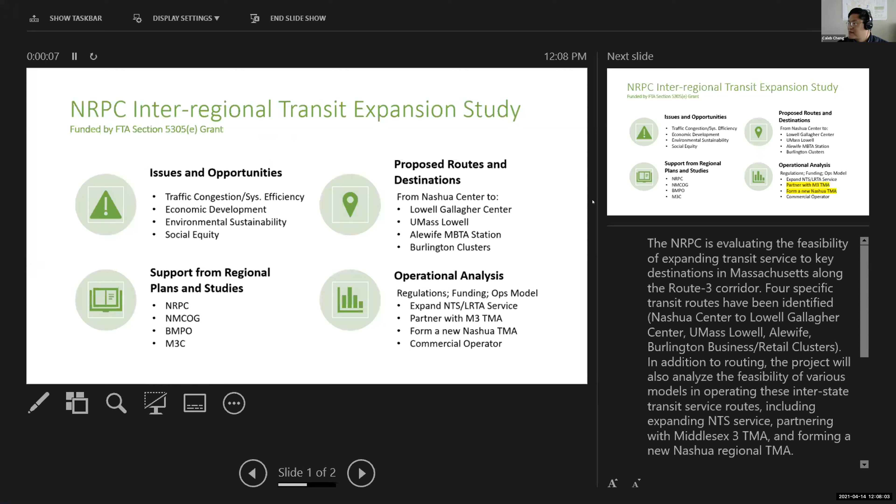Thanks, Greg. So let me share my presentation. It's more of a, let's see, which screen are everyone seeing? Yeah, you gotta change. I gotta change? All right. Or I can just leave it as is, in slide mode. Okay. I'll just do this. So can everyone see this well? Okay, great.

So just an introduction, giving the background. I know Greg said the details can be saved for another day, but we can still give you a snapshot of where we are and what we'll be looking at. The interregional transit expansion study is looking beyond the Nashua region and seeing what opportunities, particularly south of the state line, lie, and is funded by the FTA Section 5305(e) grant for this fiscal year. So we're trying to wrap it up by end of June.

The benefits of having transit connections, particularly to major employment centers, is well known. I'm sure everyone here is familiar with that as well. So some issues identified, and opportunities that this transit service can help with, include traffic congestion and system efficiency. System efficiency refers to both highway systems and also existing transit systems that might be better served by connecting this gap between systems across the state line. Economic development opportunities and opportunities to improve environment and also social equity by providing access to those who might not have a vehicle, and also to additional housing and employment opportunities.

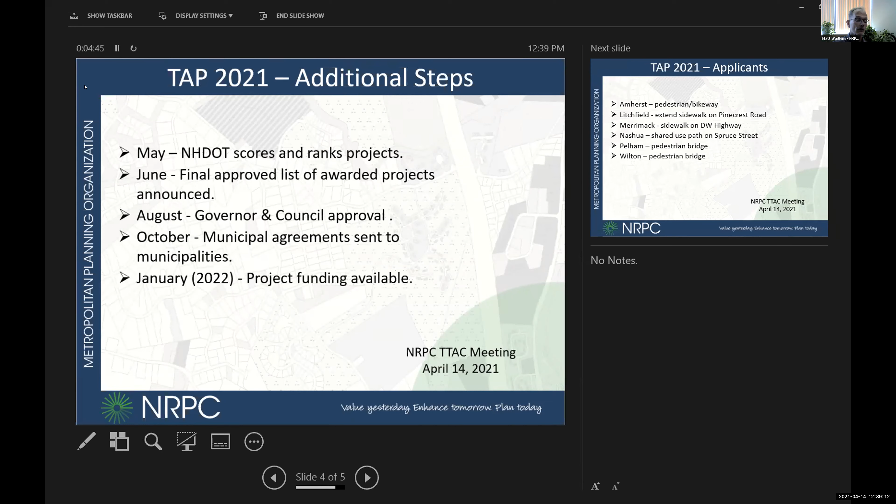Here are the applications you're going to be hearing about: Amherst pedestrian bikeway, Litchfield extension of a sidewalk along Pinecrest Road, Merrimack a sidewalk on DW Highway, Nashua a shared use path on Spruce Street, and Pelham and Wilton both proposing pedestrian bridges.

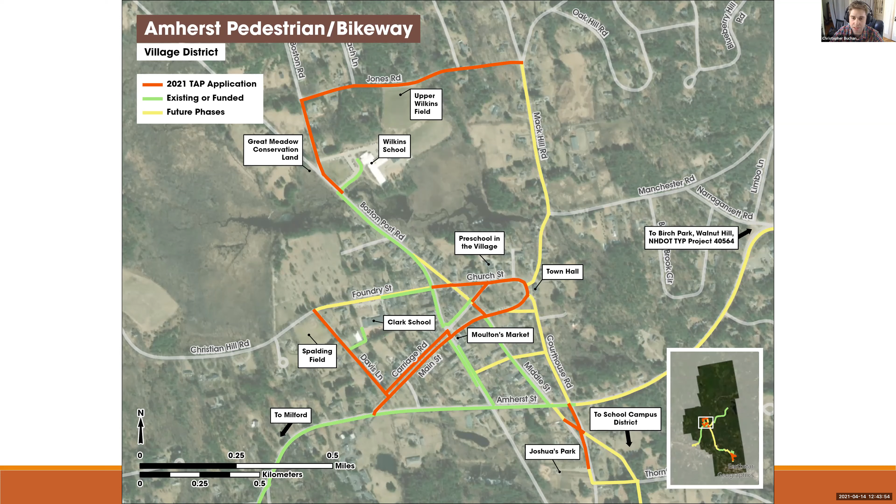Going down to the south here is the school district area, and you'll see Souhegan High School and Amherst Middle School. Just a couple of quick details about it - this is no new concept.

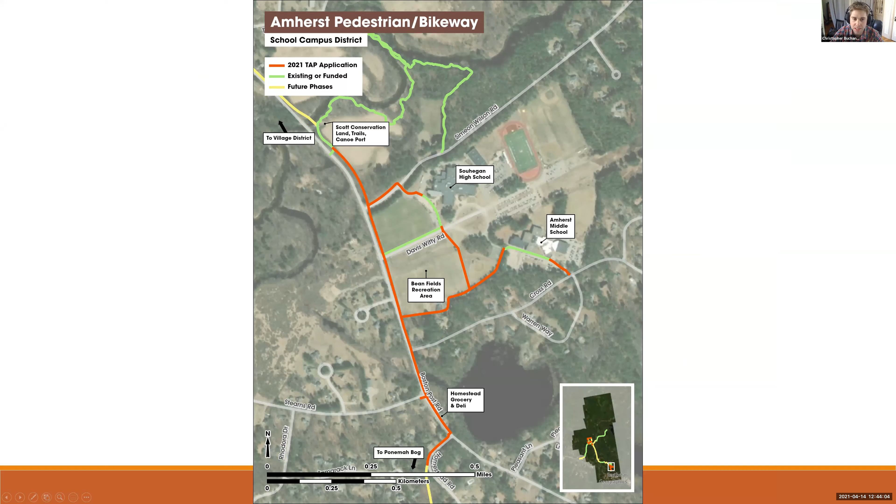One last detail about those various plans is that this concept has repeatedly come up, starting in 2001 with the CLD Engineering plan, but also as part of the NRPC's 2006 town systems preservation study, part of our bike ped plan, etc. I don't need to list them all, but in the end it was further reinforced by our 2019 multimodal master plan, which set out a vision for this sort of thing.

That plan was adopted by the Board of Selectmen in 2019. So the real goal is to have connectivity and to roll these things out when it's cost effective. A lot of this construction is scheduled to occur with or without our TAP award, just as conventional road construction. The TAP application would enhance the scheduled road construction by adding multimodal facilities within the town's right of way.

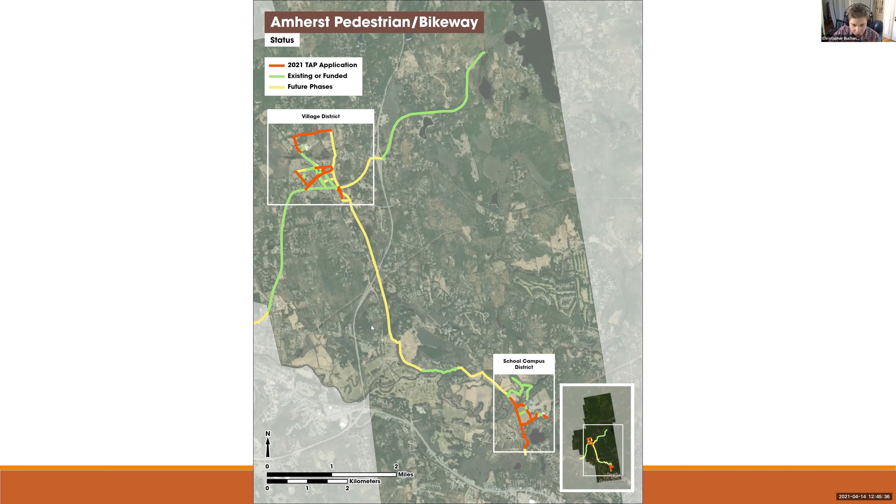So that's a little bit about the concept. I would then hand things over to DPW Director Hahn, and I'm going to stop sharing my screen.

Good afternoon, I'm Eric, the DPW Director at Amherst. I have to tell you, for this TAP grant application and for most of the other aspects of this project and others, I'm in the best possible position. I feel so good as the DPW Director, right?

So we have the support from the Board of Selectmen, very active support. Their main criteria seems to be let us go somewhere - people don't want to just go in loops around. So this first part, which is going to happen regardless of this TAP application or award, will be to connect the Amherst Village Center to the Milford Town Line and then into the Milford Oval. And they're asking me not to do this on existing funds.

So last year, the residents supported and really by a significant majority passed a $287,000 warrant article to help build this side path this year. And it is being done concurrently with the reconstruction of Amherst Street itself.

This will provide the backbone that all of the other components that are part of the TAP grant application will support. We will be able to connect to an existing facility that we are constructing starting basically next week. We're having the pre-construction meeting on Friday, and tomorrow we're having an informational Zoom meeting for the people in Amherst.

So we have our Pinecrest Road Sidewalk Extension project. We're very excited about it. This project has been discussed in town for many years. If you want to go to the next slide, Matt, let's talk about the project goals.

There are three goals for this project, and the first and foremost is to fill the gap in our existing pedestrian sidewalk system. We have a multi-purpose bike path that runs about 6 miles long, the full length of Albuquerque Ave. On Albuquerque Ave we have our high school, several recreation facilities, our brand new fire station, and our police and town office complex.

So that bike path is used every day by residents. We have outsiders coming to our community using this as well. We have the state forest where people will park their car, use the state forest trails, or use a portion of our multi-purpose bike path.

The town, way beyond my time, started realizing they needed to connect Pinecrest, the 3A and Pinecrest, to the Albuquerque bike path. They started that project connecting the elementary school located on 3A, and worked up Pinecrest, which terminated at the middle school. This grant application is looking to take that point at the middle school and continue it up to the Albuquerque bike path, which is about 5,000 feet.

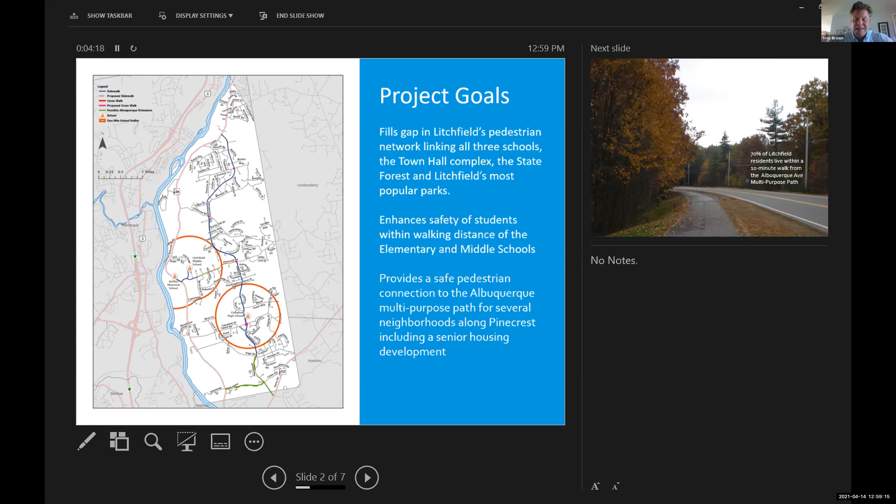It's a great project. I don't know why it hasn't been completed to date - it just makes so much sense. But I think this opportunity right now, if we're able to receive some funding, will be exactly what the community needs to get to the next level, which would be to get it on a warrant article. So Matt, if you want to go to the next slide.

The message here is that this sidewalk extension provides an incredible connection to our community. 70% of our Litchfield residents are within a 10-minute walking distance from the Albuquerque multi-purpose path. So by getting to this Albuquerque path and then safely getting all the way down to Pinecrest and the school system, it really completes the picture here in Litchfield. Go next, Matt.

This project's pretty simple. I've driven down the section of Pinecrest that we're proposing to build a sidewalk several times since January, just kept looking at it. It's about 5,000 feet in length.

We would be proposing to build a 5-foot wide sidewalk. It would have paved curbing. We would add a 2-foot shoulder to Pinecrest, and that would enhance the safety, creating some separation from

the edge of pavement on Pinecrest to the curbing and the start of the sidewalk. The great thing about this project for the engineers designing it and the contractors constructing it is the whole layout of this sidewalk would be within the town's right-of-way. You can clearly see that today if you drive your car up and down Pinecrest. It's very visual, our right-of-way. You can see that it doesn't really have an impact on the abutting neighbors or any of the landscaping.

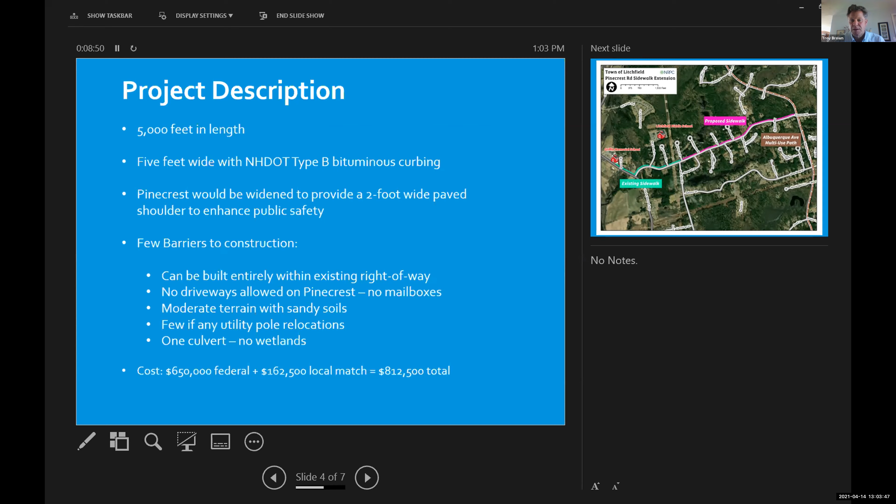I think this is just a quick slide that shows us the layout, the proposed section. You can see in the turquoise down there, that's a small section of existing sidewalk on the 3A at the Griffin Memorial School. It goes up to 3A, connecting to Pinecrest, and terminates right there at the driveway to the middle school.

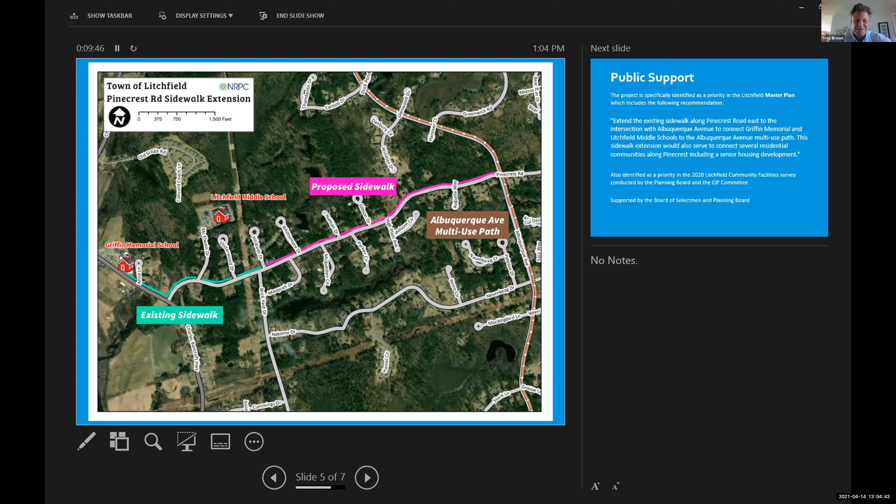So what you see in pink or purple is that 5,000-foot section, which this application is seeking funding for to construct. Once you get up to Albuquerque, you've got 3 miles basically that goes north and 3 miles that goes south. If you want to run a half marathon, then come to Litchfield, park at one of the parking lots, and you can run the full length of it, turn around, run back to your car—you've done a half marathon.

I talked a little bit about the public support. It's definitely supported by our planning board and selectmen. This summer, we were working on updating sections of the master plan, and we did a total update of our capital improvement plan. This sidewalk section was all included in those plans, and we use social media a lot for input as we put together those plans. That's where we found a lot of excitement in our community to complete this project.

So I think that's it. Pretty straightforward, simple project. It accomplishes a lot with that connection—it's just missing that connection point to really give us a complete network here in our community.

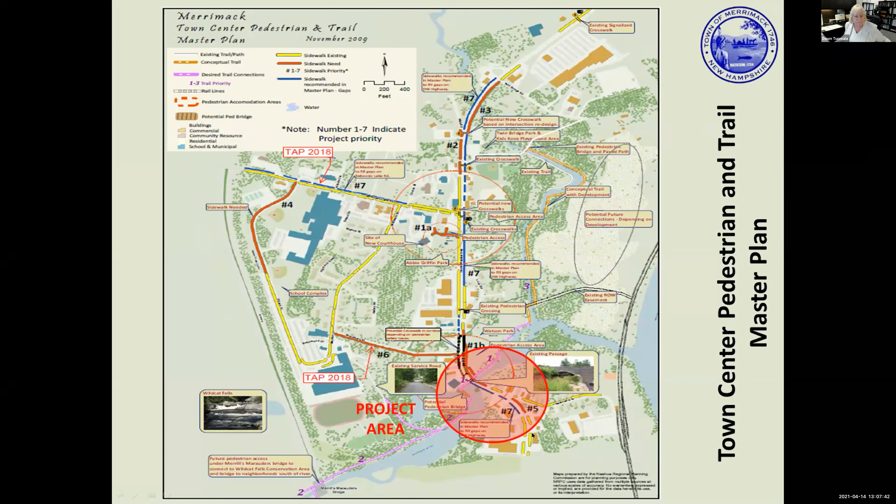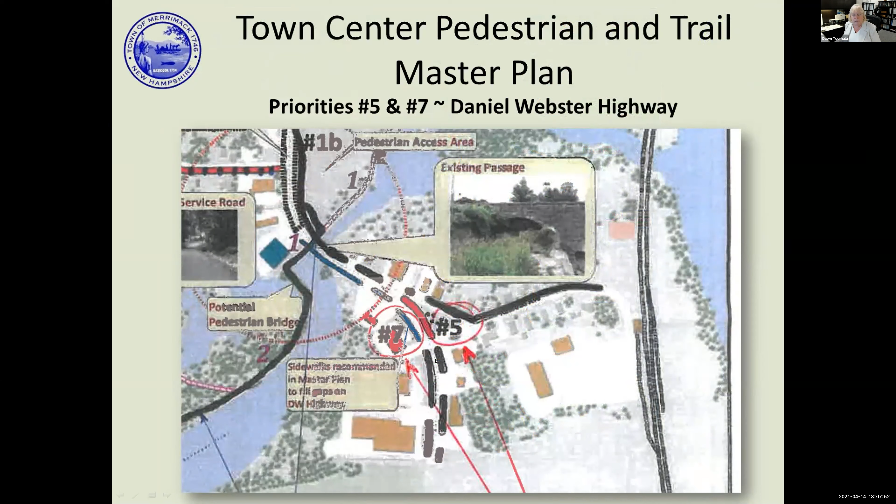We are doing one of the last connections down here at the Souhegan River, connecting the entire town center up here with everything going on down below. This is a blow up of that area. This is the Souhegan River, we've got the fire station here, and Watson Park is up here. We want to make these connections better and be able to fill in our holes.

We also realized we needed to continue our progress, not just in the town center, but north and south on Daniel Webster Highway is also in need of connections for both bike and pedestrians. So the planning board worked with NRPC, and in 2019 came up with the DWH corridor bike and ped plan. So we now have 2 master plans working together to make our connections for pedestrians and bikes.

Our area of work is going to be in this area right here. We're actually going to be joining the two, and this will be our first project of this new plan, which is really exciting to be able to do that.

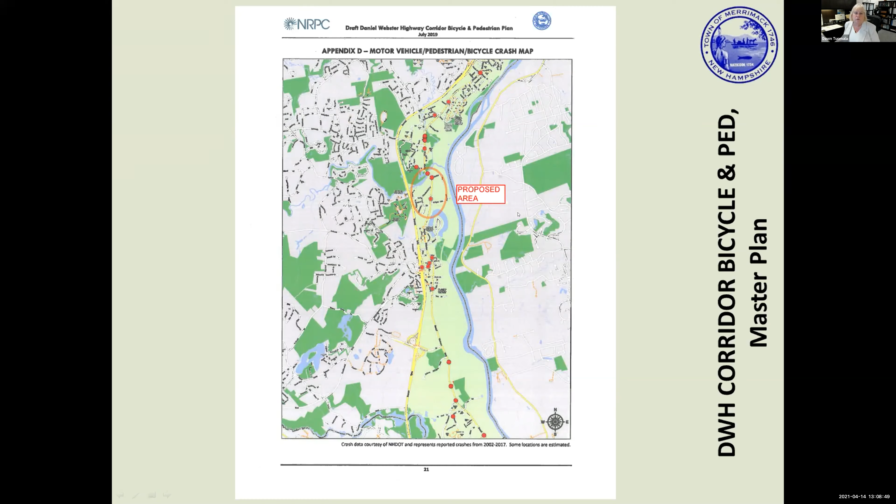That new plan is part of our master plan now, I believe it's Appendix A. First it identifies the gaps in the infrastructure, then it accommodates the future needs, identifying what's needed, and then it develops a plan for the bicycle and ped infrastructure. So what we're proposing is part of both of these plans, basically.

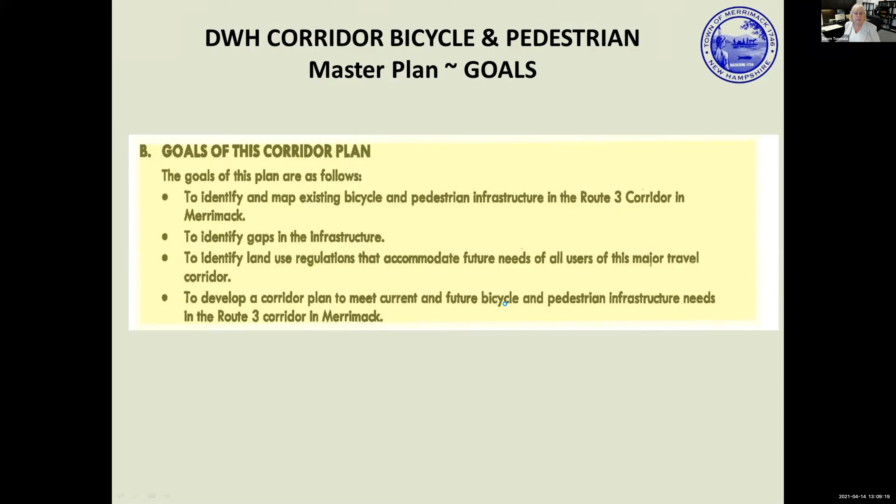Our town center committee is a subcommittee of the town council, and our goal is to provide safe and inviting access to the town residents and visitors who come into town. And I will tell you, during COVID, we've had a lot of visitors using our paths.

The scope of the work is to construct 3,600 linear feet of sidewalk along Daniel Webster Highway, connecting the existing segments to make it one contiguous sidewalk. Like I showed you before, the priorities are under 5 and 7 under the town plan.

This project will provide access to the established sidewalk. It will make connections to important town structures like the library, the town hall, a couple of different churches, and the John O'Leary Adult Community Center. It also connects a number of restaurants, drugstores, convenience centers, and professional and health offices. It connects Watson Park, which has our volleyball courts - in the winter we make that into an ice rink - and it has a pavilion and picnic tables. We've also enhanced the parking area there.

It's also going to be the entrance to our Souhegan River Trail project. That trail leads to the high school and also under the F.E. Everett, which is one of the few connections we have going across the F.E. Everett. We have an extensive trail system on the west side of the F.E. Everett, and it also provides walking distance to the Twin Bridges Park and the Kids Kove Playground. And yes, Kove is spelled properly - that's the way they spelled it.

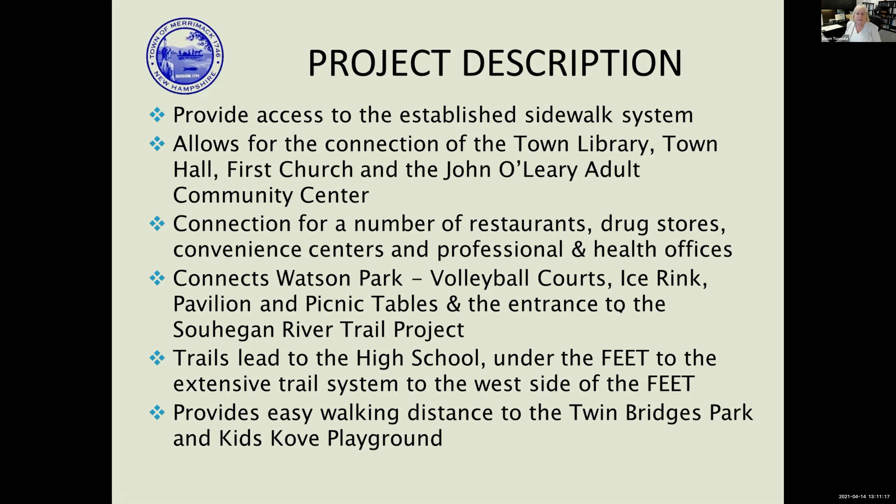Our project runs from the Souhegan River on the north, all the way down Daniel Webster Highway to what's called the 360 Plaza. This used to be the old Shaw's building, and in the last few years they've renovated it, and it's just taken off in this whole area. There are small sections of sidewalk - there's a big gap here, but also a couple of small sections that exist - but we need to connect it.

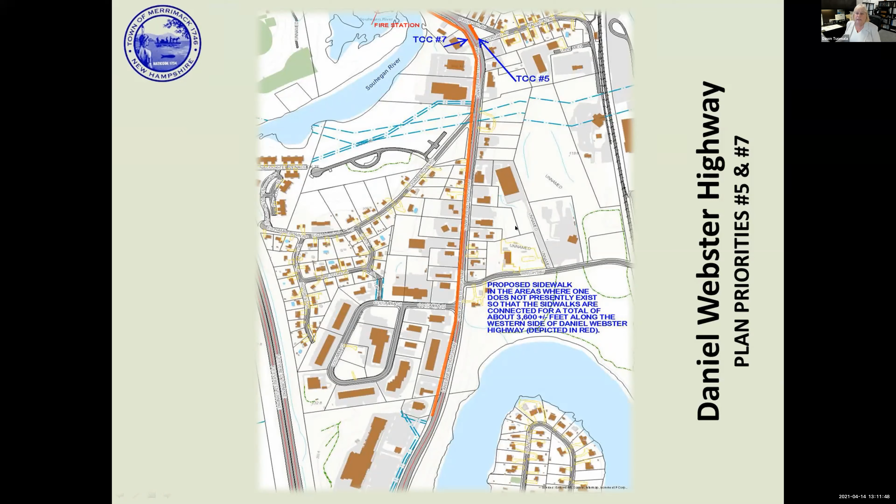We may need to make that connection between all of this. This area is growing significantly in leaps and bounds.

So to break the project down a little bit, this is Watson Park up here on the northeast side of the Souhegan River. Here's our fire station. This is all the town center as it is defined by the town center committee. There's an existing sidewalk that comes in red all the way down through. We have no connection coming across the street.

So we would like to be able to have safe access coming across the street for pedestrians. We also don't have a section of sidewalk in here, but we do have a section that starts going down south.

This is also our trail system, which is our 2014 TAP grant, which will connect into an existing trail system, which we'll get into a little bit later.

Going further south on the Daniel Webster Highway, there is a small section of sidewalk in this area. And this section up here is now considered elderly housing. It's a project that's nearing completion. As part of that project, we made them put this section of sidewalk in so that we have a connection between these two areas here.

So we will pick up the project again at East Chamberlain Street, which is what this is, and continue south. This whole area does not have any sidewalk in there.

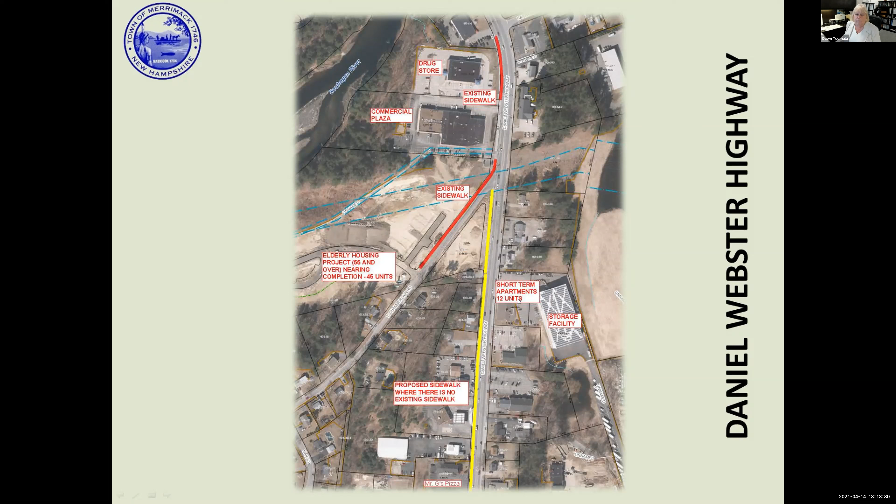We're also very close to approving short-term apartments in this area here. People that need to come in and have a place to live for a few months, that type of thing. That's his idea of this building here. He also has a storage facility in the back.

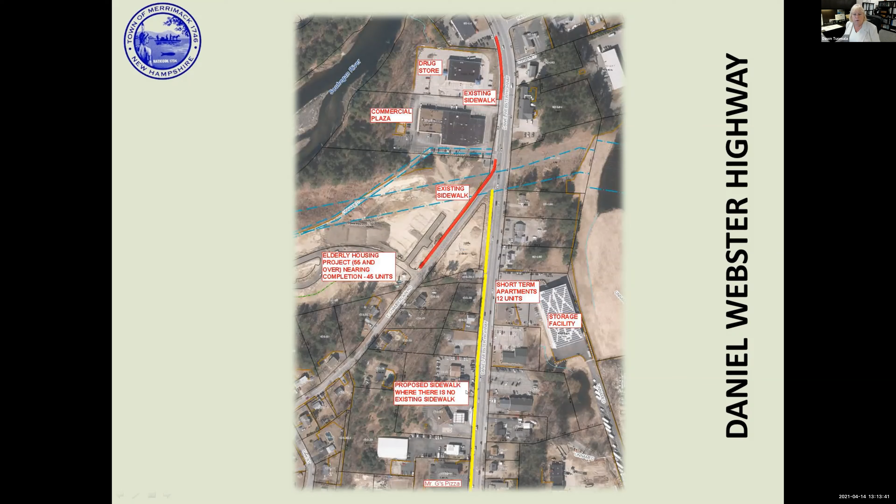And this is, again, the area where we want to construct the sidewalk, which would be on the west side of Daniel Webster Highway. And continuing southerly, there is no sidewalk in through here.

Again, there's a bunch of commercial buildings, restaurants, different wide variety. This is the 360 Plaza, which has been renovated. And you can see from the photography, there's already cars that are parked there. This whole plaza has really taken off.

In addition to this plaza, they're proposing another 45 units up behind this plaza. So we've got more potential that's been approved. They're working on their construction financing. And then down to the south, just past this photo, we have workforce housing that was just completed also.

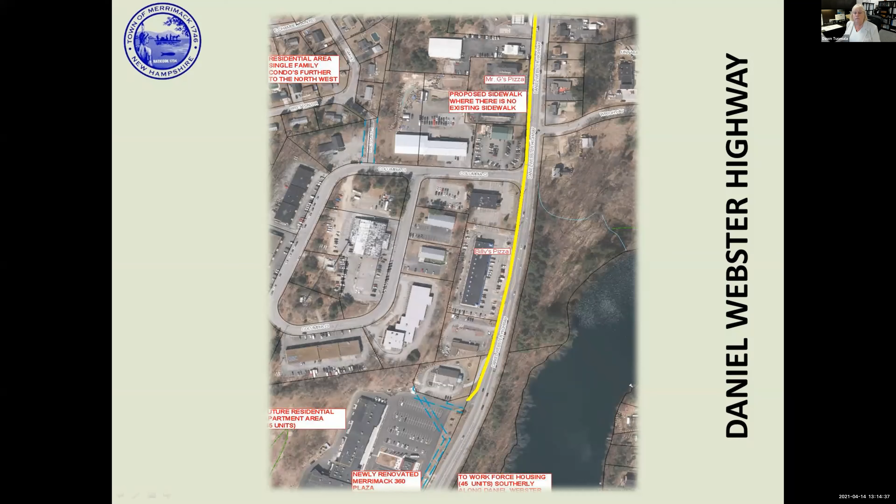So we're having a number of facilities that are being brought into the area, which is going to increase our residents, which increases the people out walking.

We have absolute total support of our town council. It was a 7-0 vote. This is their letter. We also have a letter from the town center committee and from the planning board. I also talked to the police chief, and he also supports our doing this project from a safety point of view, because there are accidents out on that road.

Likely to succeed? It's absolutely going to succeed in one form or another.

Last year, not knowing whether the TAP grant was coming or not, the town council set up to put sidewalks into our infrastructure in much greater detail. They want to see 5 different projects moving forward, this being one of them. And this is also one of the town center's major goals.

The bike and ped plan is shown in the 2013 master plan. And the police are concerned with the safety for the pedestrians. That's their chief main concern.

In public works, we are committed to improving and providing safety, not just on our roads, but also for the trails and sidewalks, because we have a sidewalk plan where we take care of those also, along with helping the Conservation Commission with the trail system.

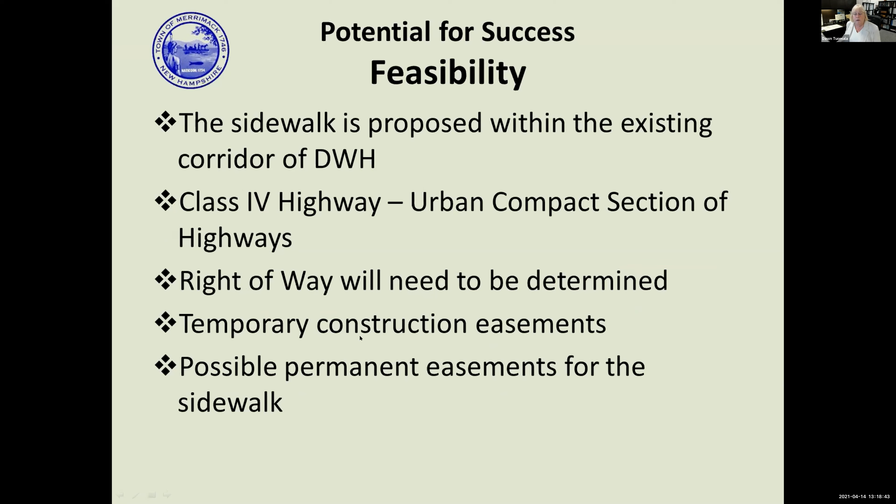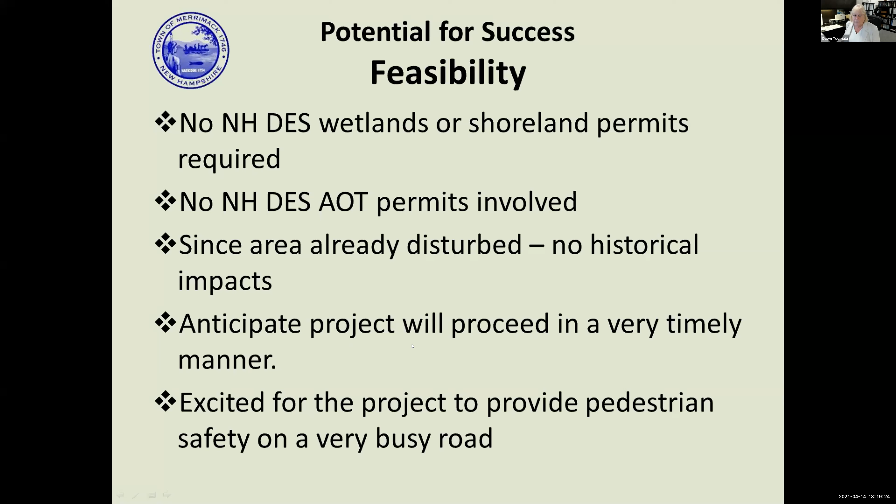So for potential for success, the feasibility - again, we have no wetlands or shoreland permits required. We're in an area that's already been developed. We don't have any AOT permits involved. The area isn't that big, and since it's already disturbed, there are no historical impacts like Indian artifacts, unlike other projects. The project is anticipated to proceed in a very timely fashion, and we're extremely excited to have this project because it's a very, very busy road.

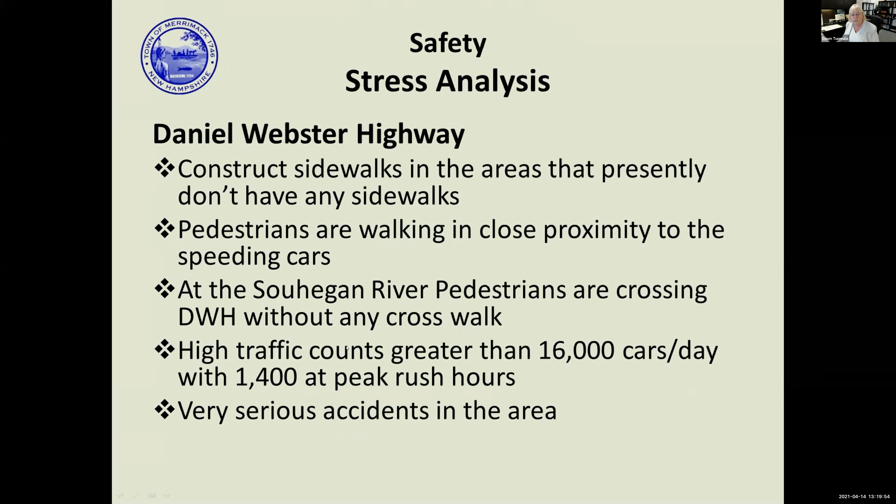We just want to construct sidewalks in the area where there aren't any. Right now pedestrians are walking in close proximity to speeding cars. At the Souhegan River, pedestrians are crossing without any crosswalk. The traffic counts in this area are 16,000 cars a day, with 1,400 at peak rush hours, and there have been substantial serious accidents in this area, which I will show you.

Our issues are many - new housing complexes are going in. We have workforce housing with children, elderly housing, short-term housing, and regular standard market rate apartments within this area. None of this area allows for anybody with disabilities to have access. So it requires advanced skill and knowledge to cross Daniel Webster, and it's not suited for pedestrians or bicyclists.

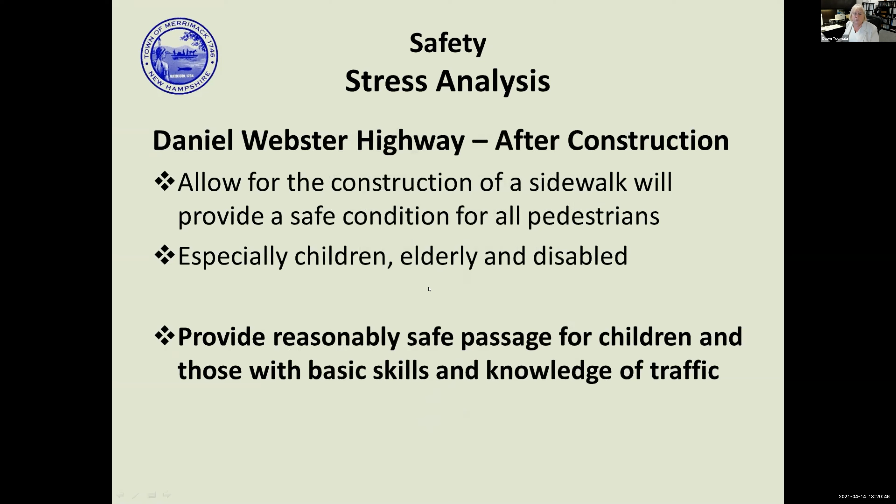After construction, the sidewalk will provide a safe condition for all pedestrians, especially children, the elderly, and disabled. They'll have safe passage without needing advanced skills and knowledge of the traffic.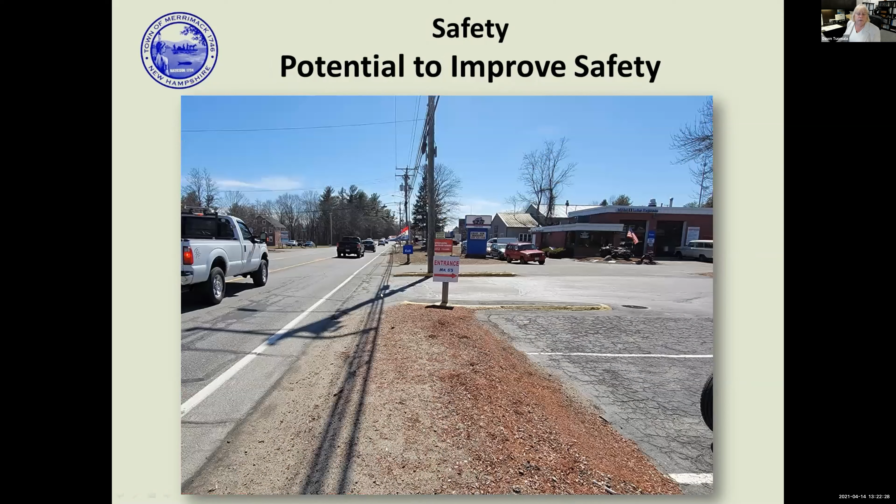This is looking back north. There's a small section of sidewalk we want to connect, and down here's the bank, so we'd want to connect across the street somewhere in that area. Most of the area looks like this, with our poles behind, so you're walking right beside the highway. This car is just going through, and none of them go 35 miles an hour, I can tell you. Looking back the other way, you've got the same conditions going up this road.

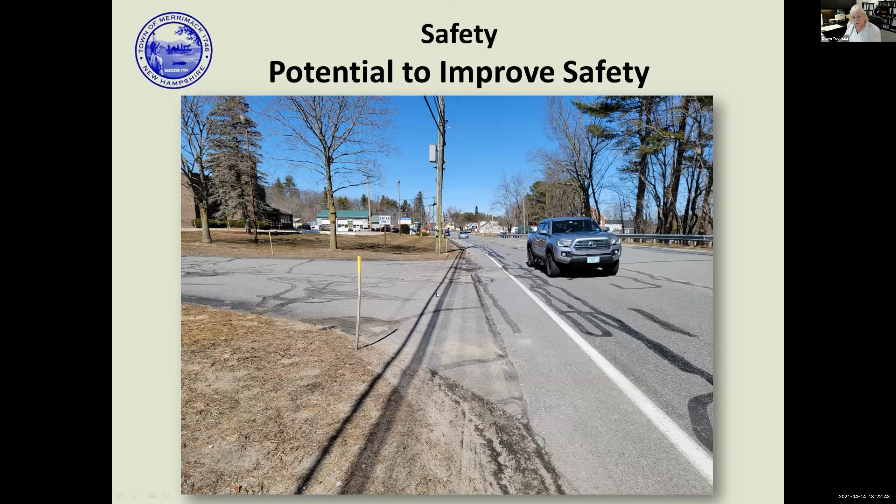We've got an intersection with major roads - Columbia Circle, Wright Road. They have heavy traffic, large truck traffic, because there are industrial areas on both sides of this road. This is the 360 Plaza - you can see the cars in there. It's been a great boom for the town.

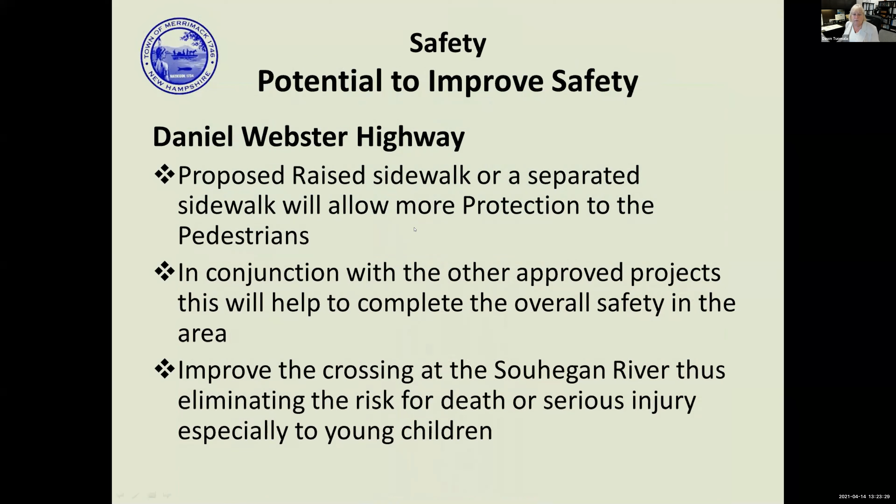There's going to be another set of residences up here behind this whole complex. In order to improve safety, we're proposing either a raised sidewalk or a separated sidewalk. You'll see we have both in our downtown already, and that will allow for protection of pedestrians in one fashion or another. In conjunction with other projects, this should make overall safety for pedestrians much better, and it will improve the crossing at the Souhegan River, which is a serious concern to us.

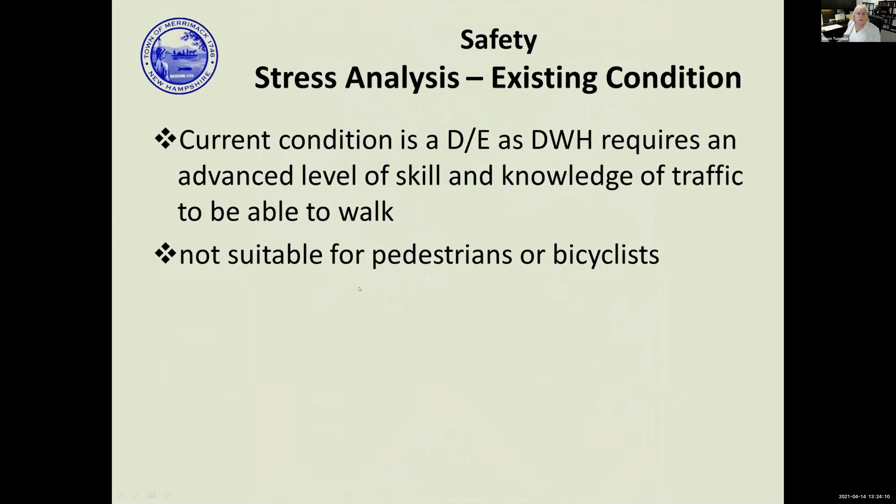For stress analysis and safety, the current condition would be a D. Daniel Webster requires an advanced skill level to be able to cross the road, and it's not really suitable, especially for young pedestrians, the elderly, disabled, or bicyclists. In the future, with the sidewalk construction, we anticipate it will be at a level A-B. It will make connections into existing sidewalks, not only on Daniel Webster but going off of it. The crosswalks will be in the appropriate location, and the raised sidewalks will provide safer pedestrian paths, keeping them out of vehicular traffic, and improving the crossing.

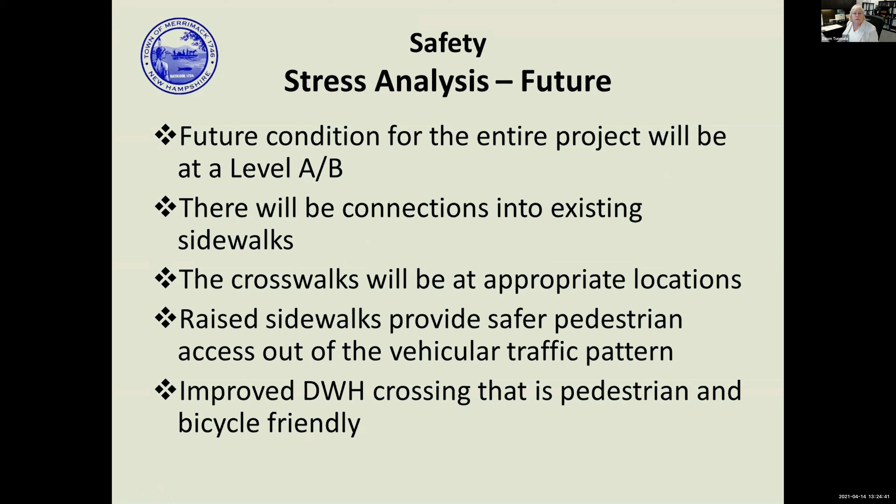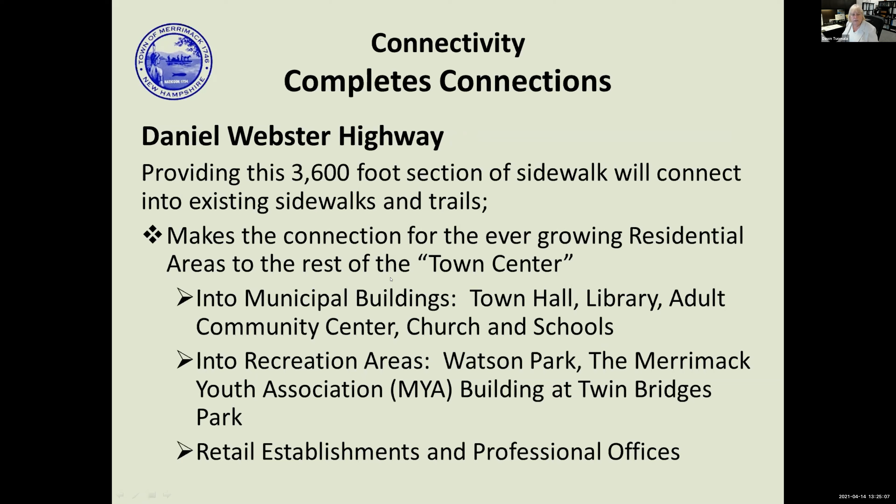So it completes the connections, making connections from residential areas into the rest of the town center area. There are municipal buildings in that area - town hall, library. It also has recreation areas, the Watson Park, the Merrimack Youth Association building, and the Twin Bridges Park. It also will connect the retail establishments and professional and health offices.

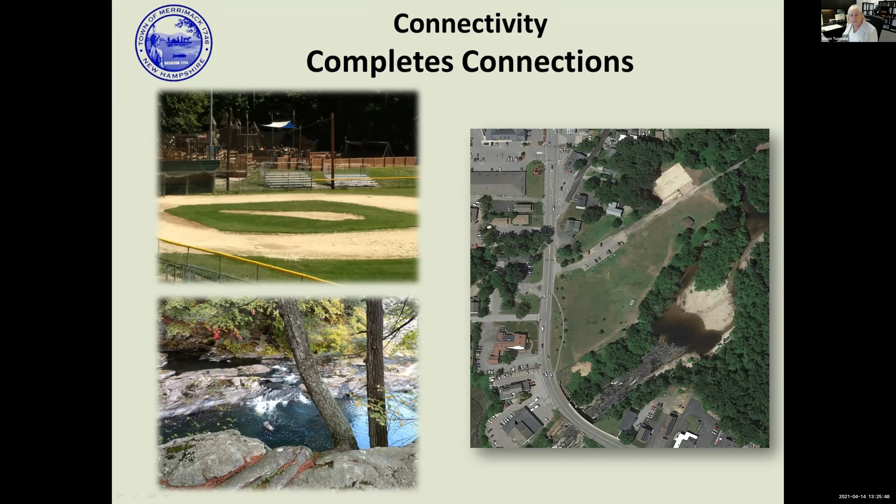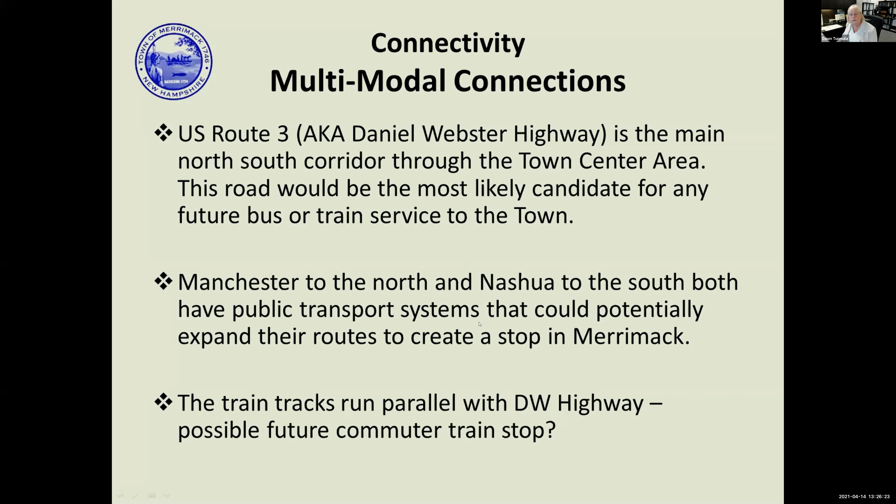Daniel Webster is our main north-south corridor within town. The F.E. Everett basically parallels it, and it would be a candidate for any future bus service. To the north and south, at both ends of town, there are large residential developments going in, so I can foresee that in the future we're going to need some type of transport services coming through. We also have the train tracks running parallel with the Merrimack River all the way up through, so there's a lot of potential there.

The economic and tourism benefit will connect the residences with the downtown commercial area, with restaurants and health services. The connection will also be made between the schools, churches, and town facilities, and it will draw tourists - which we know through COVID absolutely brought people into our trail system and parks. We had a real problem last year because it was just overwhelming. So they do come, and we have an extensive trail system.

One of the projects that the town council requested I start, which I did last year, was the sidewalk connecting Woodbury Street from the high school all the way down to Daniel Webster. This had been a previous TAP grant. They didn't want to wait anymore, and we didn't know this TAP grant was coming, so we already started work on this really important connection.

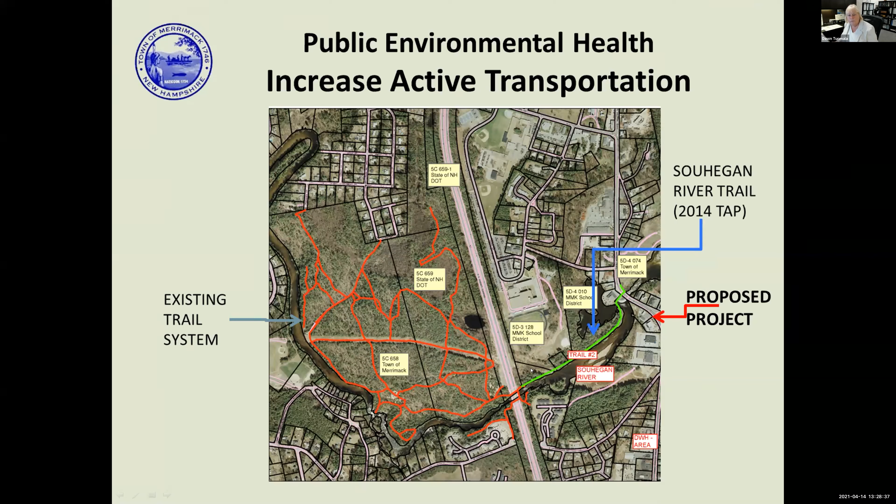This is the trail system to the west of the F.E. Everett and our new trail there. And here's the Watson Park. And of course, I'm done.

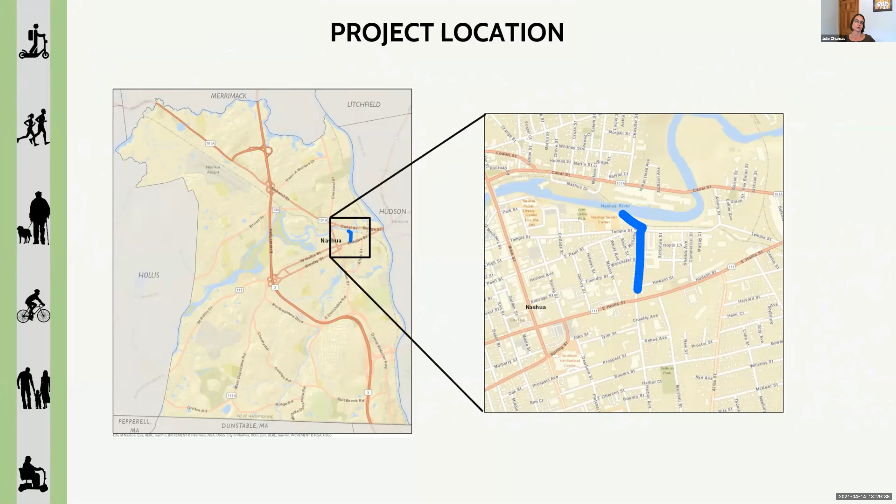Over the last 30 years, the city's worked to expand and improve its bicycle and pedestrian network, especially in the downtown area, where we have dense housing and a high percentage of residents without access to a vehicle, mixed in with a lot of commercial and service sector businesses. Bicycle use in particular has increased steadily over the last decade, and as such, all of the Nashua transit system buses are fitted with bike racks. The city made a major investment in its Main Street sidewalks a number of years ago and is striping bike lanes on newly paved roads where feasible.

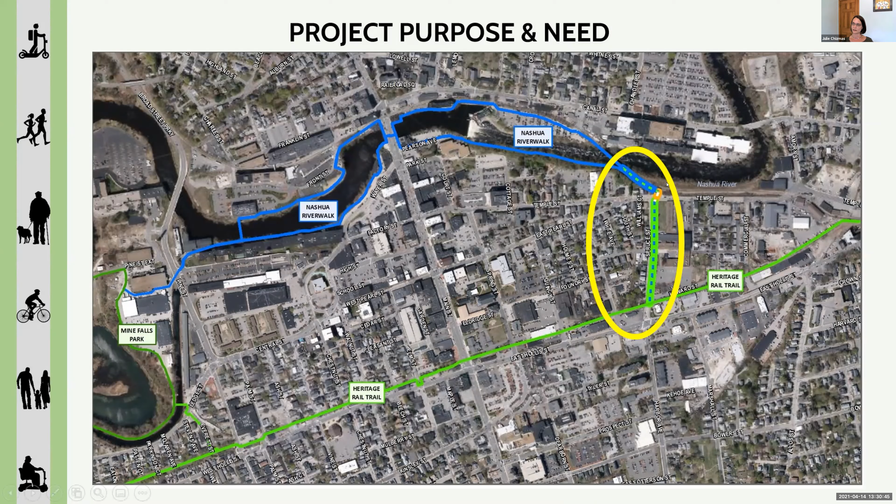The city will soon be moving into the design phase of a CMAQ project to construct the Heritage Rail Trail East, and the Nashua River Walk project is actively in the design phase. If awarded, TAP funding for this project will be used to construct a vital link between these two non-motorized networks that provide access to the city's 325-acre Mine Falls Park and its miles of paved and natural trails, as well as to other destinations in and around downtown Nashua. So our project proposed is this in the circle here, the Nashua River Walk to the north, the Heritage Rail Trail to the south. This will connect them.

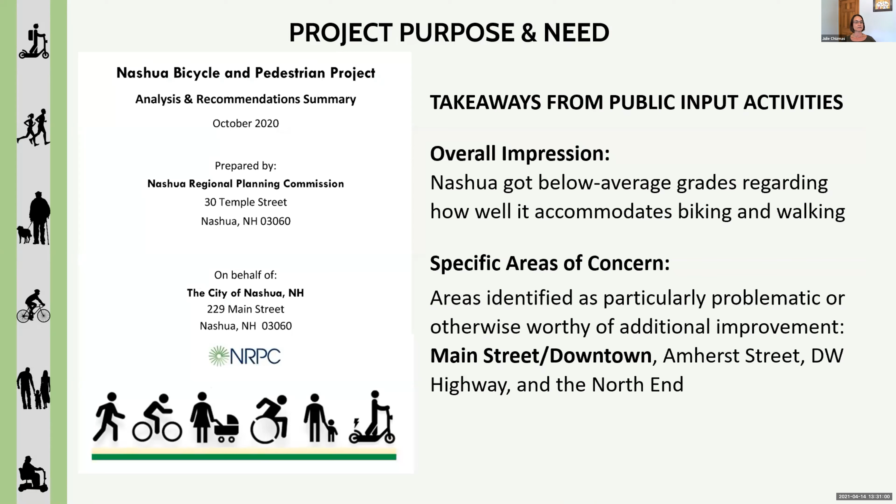Last year, the NRPC completed a bike ped study that included robust public outreach. Input from those efforts clearly identified the need to improve conditions and identified downtown and the Main Street area as particularly problematic. It highlighted that we have deterrents to walking and biking that include a lack of separated facilities, and there was absolutely overwhelming consensus that the city needs to focus on connecting its trails.

As mentioned previously, this project is located in the heart of downtown Nashua. There's a lot of high density housing that will benefit from this project, including the two Sullivan Terrace senior housing properties with a total of 196 units, and the new Marshall Street apartments with 152 units. And these properties do have affordable housing. Additionally, 168 units have been approved on Temple Street and 80 units approved for the old Henry Hanger building on East Hollis Street.

The connection will also provide improved access to services, including City Hall, the Transit Center, the Post Office, the Courthouse, the Public Library, and the Senior Center. And finally, we have major employers in the area that will also benefit from the project, including BAE and Southern New Hampshire Medical Center.

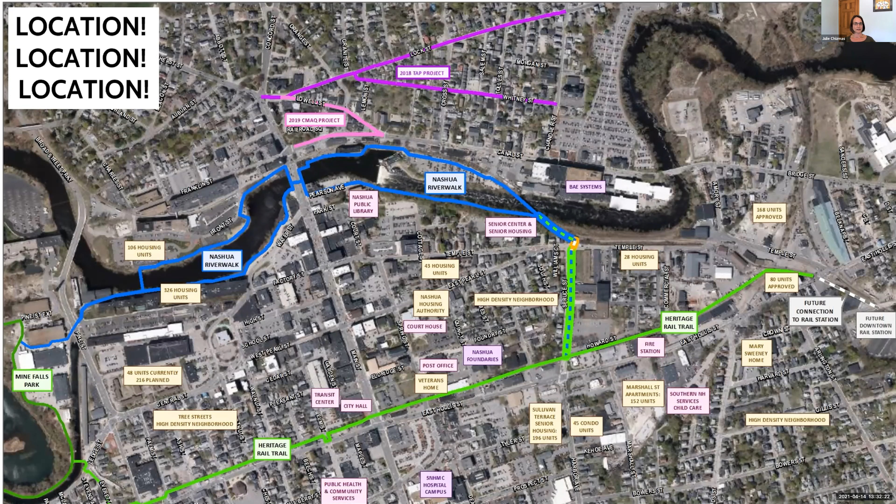In addition to the Riverwalk and Heritage Rail Trail, this project builds upon other planned projects, including the sidewalk and bike lane TAP project on Locke and Whitney Street, and the CMAQ project to enhance safety, improve traffic flow, and install bike lanes around Railroad Square. And for those living north of the Nashua River, it will be much easier and safer to walk or bike to the future commuter rail station on Crown Street, just down over here.

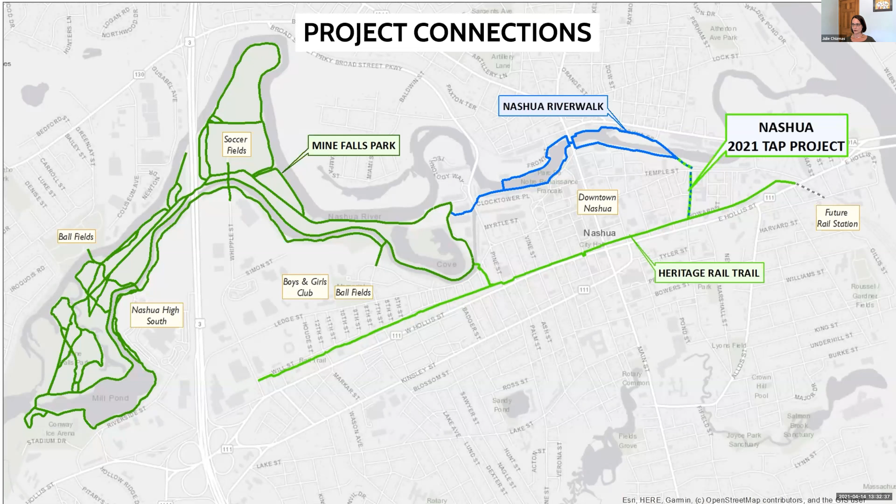Overall, there will be so many destinations that you can safely access without using a car, and some of them I've highlighted on the map here. We also have Nashua South, just north of the ball fields on the west side of the Turnpike.

Moving on from project location to project scope, we propose to improve an existing rail-with-trail that begins, or will pick up from, the Nashua River Walk near the pedestrian bridge over the Nashua River. The city signed a lease with B&M Railroad in 1996 for the use, construction, and maintenance of the pedestrian bridge and the trail to Temple Street, so we don't need to acquire right-of-way from a rail company or negotiate an agreement for this part of the project.

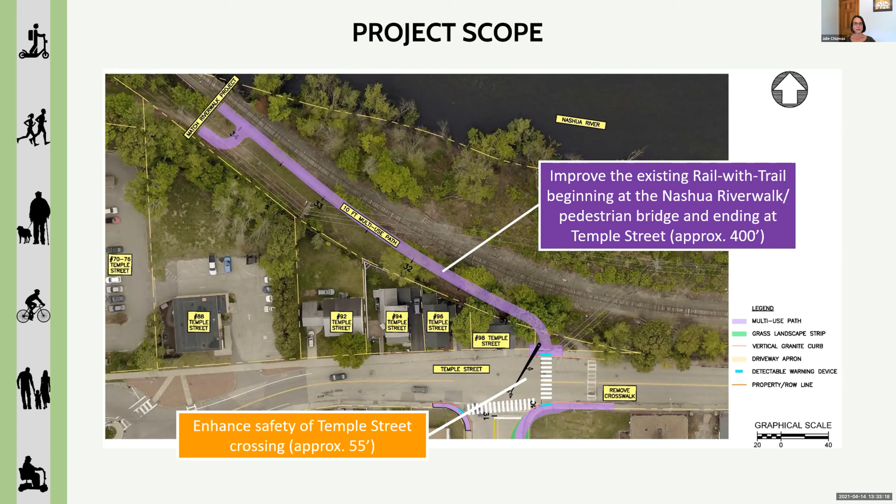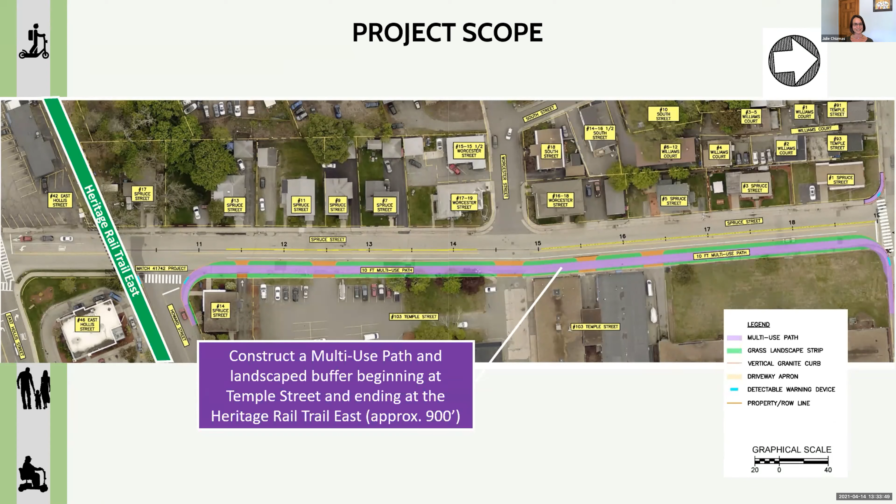The project will also enhance the visibility and safety of the crossing of Temple Street over to Spruce Street. On Spruce Street, where we have ample right-of-way, we'll replace the existing sidewalk on the east side with a multi-use path. The east side is all commercial with fewer curb cuts than the west side, which is all residential. Businesses on the east side include a bingo hall and a church. The project will terminate at the Heritage Rail Trail East, which runs along Howard Street. The Heritage Rail Trail project is going to install a rectangular rapid flashing beacon, or RRFB, at the Spruce Street crossing.

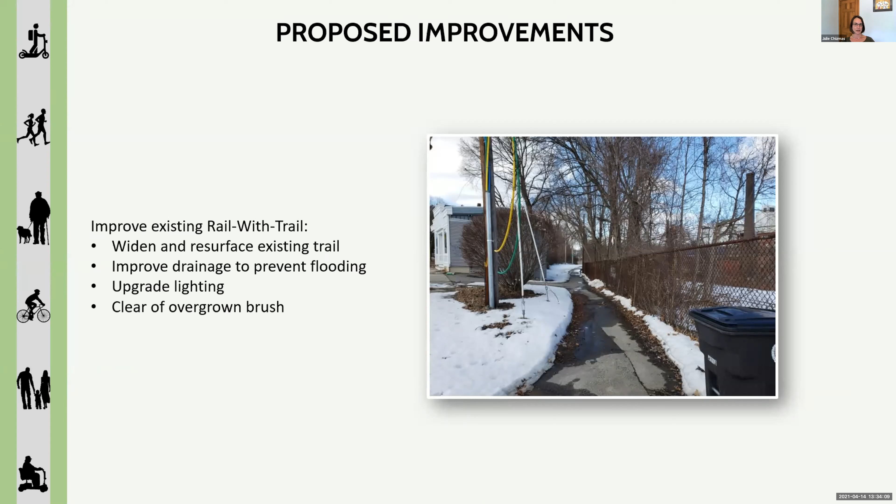Zooming in on the specific segments of this project, this is a view of the existing rail-with-trail leading from Temple Street to the pedestrian bridge. There are drainage issues which this project will fix. The trail will be widened and resurfaced, lighting will be upgraded, and overgrown brush will be cleared.

At the Temple Street crossing, we anticipate a HAWK system will be recommended in the engineering study and have budgeted accordingly. At the very least, an RRFB will be installed. We'll also bring the crossing into compliance with ADA standards.

On Spruce Street, we propose to construct a 10-foot wide paved multi-use path with landscape buffers. Impediments would be removed, such as the mailbox, and traffic would be calmed on this cut-through street by narrowing travel lanes, adding a landscape buffer between the travel lane and the new multi-use path, and constructing bump-outs at the Temple Street and Howard Street intersections.

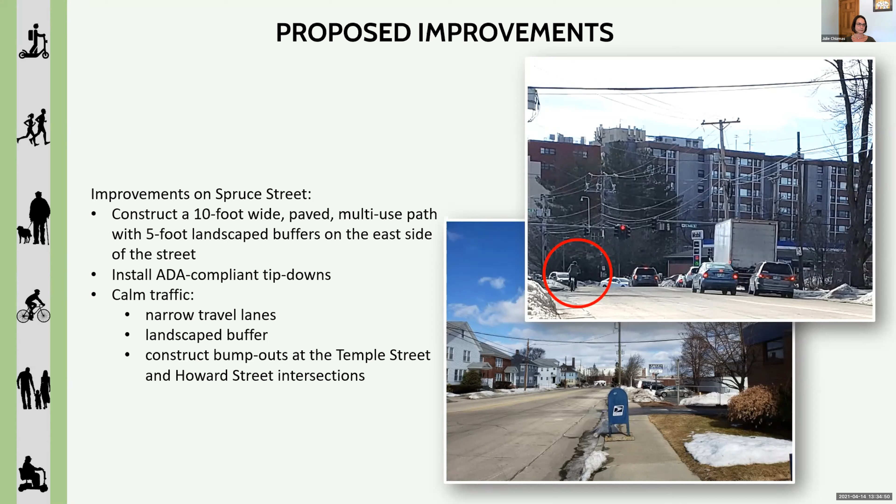We really feel this project will improve safety for non-motorized users who want to navigate around downtown safely on routes separated from vehicular traffic. Both Temple Street and Spruce Street currently have a C stress level due to their function as major collectors and the speed at which traffic generally travels, often exceeding the posted 30-mile-an-hour speed limit. Spruce Street acts as a cut-through for people trying to get off the frequently congested East Hollis Street, further contributing to a high level of traffic stress for those on bikes or on foot.

Traffic volumes on both urban streets are fairly high, with DOT records showing pre-COVID 2019 annual average daily traffic volumes of about 4,600 on Temple and 3,800 on Spruce. There is a crosswalk where the existing trail crosses Temple Street, but it doesn't have a pedestrian beacon and isn't very visible.

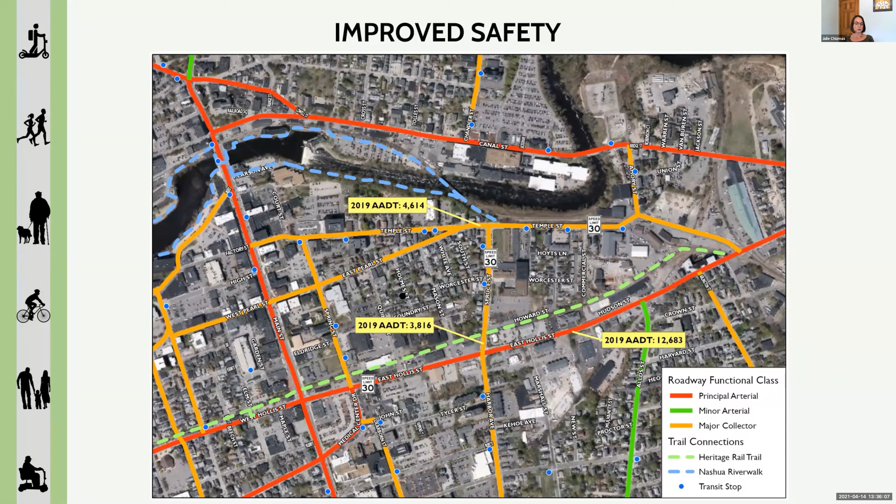The anticipated stress level for the project area will be an A after the improvements are completed, as the improved trail is off-road and the multi-use path on Spruce Street will be separated from traffic by a landscape buffer. The visibility and safety of the crossing at Temple Street will be greatly enhanced with the installation of either a HAWK beacon or an RRFB to slow down and control traffic. The project is located along a Nashua transit route, so people will be able to bike or walk more safely to and from their stops.

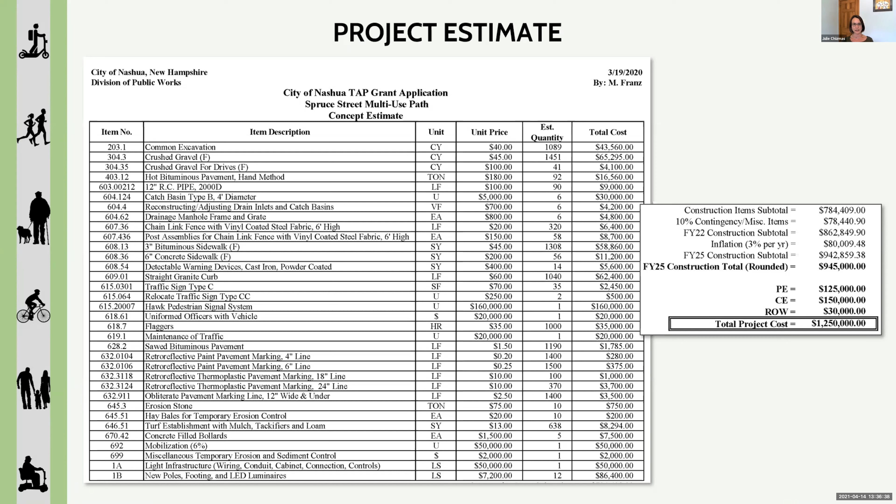Our estimate for the project comes out to 1.25 million, including the HAWK system, which is about 160,000 for the crossing. We also added inflation to account for an anticipated 2025 construction year. While we anticipate this project will be constructed on the leased B&M land and within city-owned right-of-way, the engineering study may show a need for permanent easements to accommodate the street crossings, or temporary easements during construction, so right-of-way funds have been estimated accordingly.

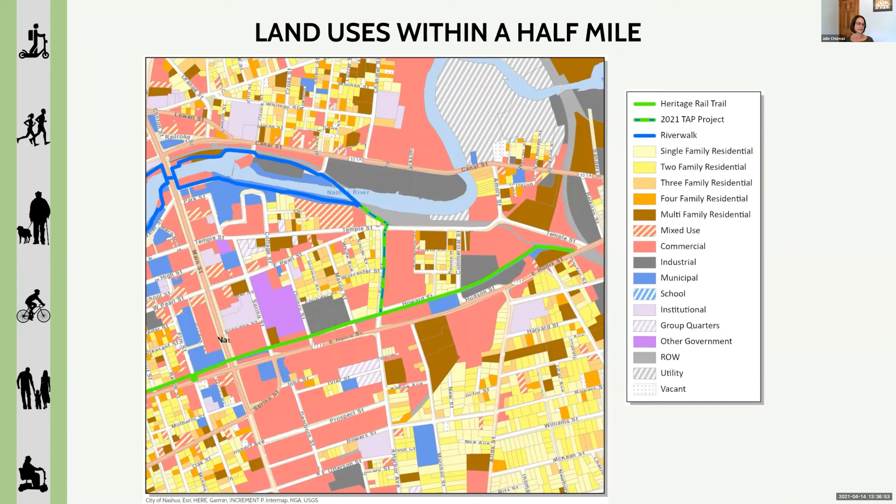This map shows the land uses within a half mile of the connector. As previously mentioned, it's a lot of commercial, shown in pink, and residential, shown in yellow and orange tones, with multifamily in brown tones. We also have access to many religious institutions and services.

There are about 11,200 residents and 5,100 households in the census tracts adjacent to the project and connecting trail systems. Census data for 2018, the most recent year available, shows 11,600 jobs in the 3 census tracts. So this project really is in the heart of a residential commercial area. The area has high percentages of underrepresented individuals, high rates of poverty, and a high percentage of adults with health issues who would really benefit from a safe, free place to exercise outside of a gym.

There are a lot of renters in the area, over 75% of households are rented, and many of the properties have very limited parking. So between that and the high poverty rates, it's no wonder that vehicle ownership rates are really low in these neighborhoods.

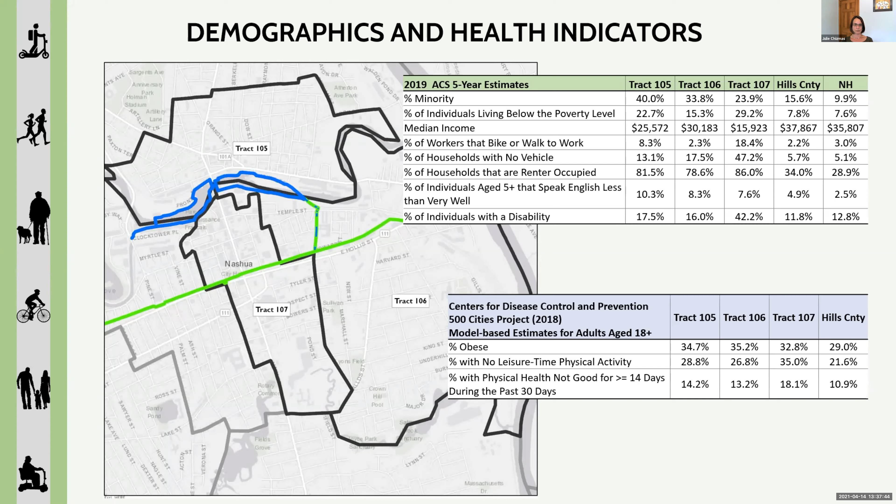The project is strongly supported by the draft mobility goals of the city's master plan, currently being updated through an effort known as Imagine Nashua. These goals were developed based on input heard during several public meetings and two online surveys. The city strives to have a well-connected multimodal system that helps reduce greenhouse gas emissions and promotes active transportation. It wants to have complete streets that provide safe options for bicyclists and pedestrians.

Our goals in this plan, which we hope to put into effect in July of this year, really show that commitment. The project is also consistent with the goals of the regional ped and bike plan by accommodating bicycles and pedestrians, supporting local networks, and enhancing conditions for non-motorists.

It's also supported by the mayor, BAE, one of the city's largest, if not largest, employer, and the Nashua Senior Center, which is located within the project area.

And then with respect to feasibility, the city has a 30+ year history of investing pretty significantly in its bike and ped infrastructure, with a focus on the downtown in more recent years. We have a commitment from the mayor to provide a 20% match using our general fund, and we have very strong cash reserves to support the project through the reimbursement process.

We also have the expertise and experience to successfully manage an LPA project, with several staff members holding LPA certifications. And we have experience maintaining these types of facilities, including winter maintenance. We have the equipment and the plows to be able to maintain these year round.

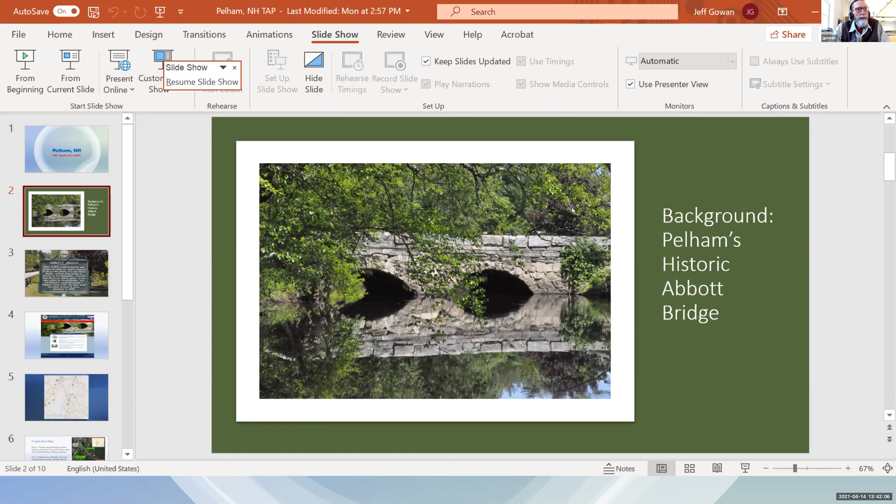This bridge, bear in mind this view if you would, I'm going to spare you reading all this, but it's a historic bridge, the last or the oldest remaining non-pointed stone arch bridge in the state. It was restored in 1998. It is very narrow, perilous. You can barely fit two cars across it going different directions, much less any pedestrian situation. This bridge is very much part of our community's character. It is, for example, on our webpage as the main background feature.

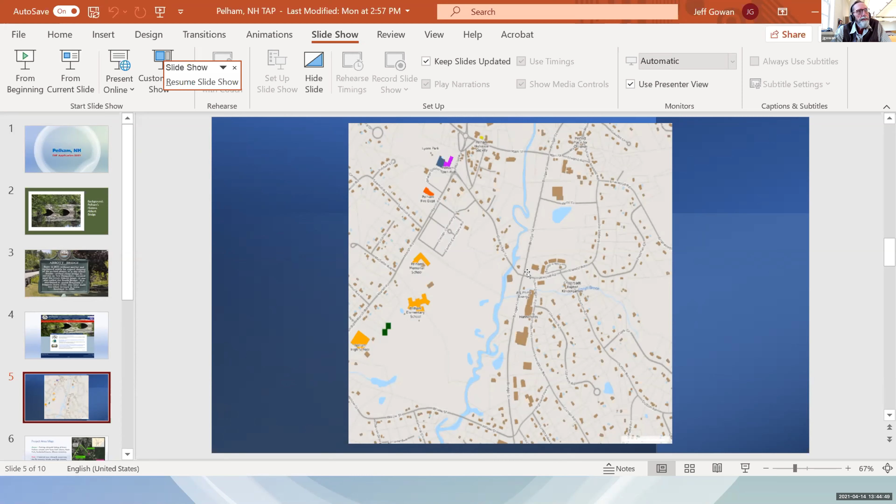Here's the locus, or the map, that we submitted with our application. This green is existing sidewalk.

This took you down to the schools we talked about a minute ago, but it ends here. We're proposing to extend the sidewalk along this area, then have essentially a stone dust path, if you will, from that sidewalk to the pedestrian bridge, back to the sidewalk, and then down across Route 38, crossing wherever DOT prefers, either on this side of the intersection or crossing the street.

So that's it in a nutshell. The green is the existing sidewalk, the pink is proposed, and the orange is the walking path and proposed pedestrian bridge.

As a result of the Mother's Day flood, which we all remember, we did in-depth flood studies that showed we need to reconstruct our bridges, not from the north, upstream down, but downstream up. That's why this flood relief structure is currently being planned and will be constructed.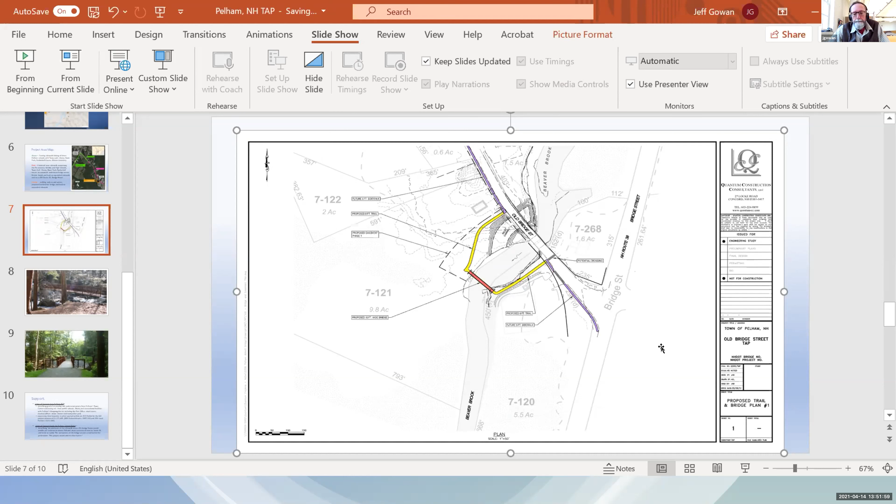And I would throw in that although I'll be retiring at the end of May, my planner, who will be interim planning director — and I'm hopeful, and I think it's very likely, will ultimately become planning director — is also LPA certified. So we got that base covered, as well as some more members of our town who are full-time employees going to be seeking LPA certification as well.

All right, thank you, Jeff. Any other questions for Jeff? Thank you.

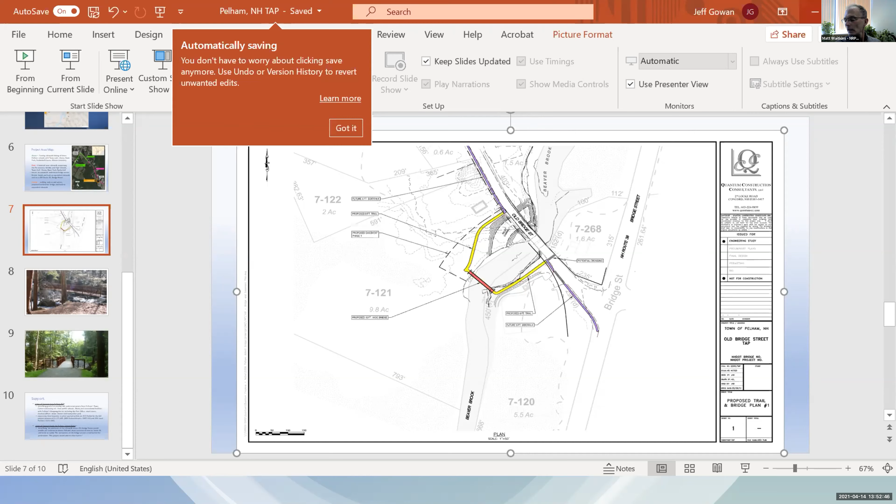And that would be Wilton. So Jennifer, are you going to run it from your end, or you want me to open it? I'll give it a shot on this end. Everybody see the screen? Yep.

Okay, so this is a little different from what you've heard so far. Wilton, as you know, is a small rural town with a rather interesting little downtown area that we are looking to completely revitalize. And this particular project — I never thought, being from New York, I would actually be trying to sell somebody a bridge, but that's what I'm here to do.

You will see from my background that this project and a lot of what we are doing in Wilton is actually a real combination between both economic development and conservation, two hats that I wear. So the bridge that is the focus of the TAP grant, the first one the town has ever done, is actually a keystone piece of architecture. It connects to what we like to call urban trails on the western part of our town. Think of it as the keystone in an old stone bridge, the thing that pulls things together.

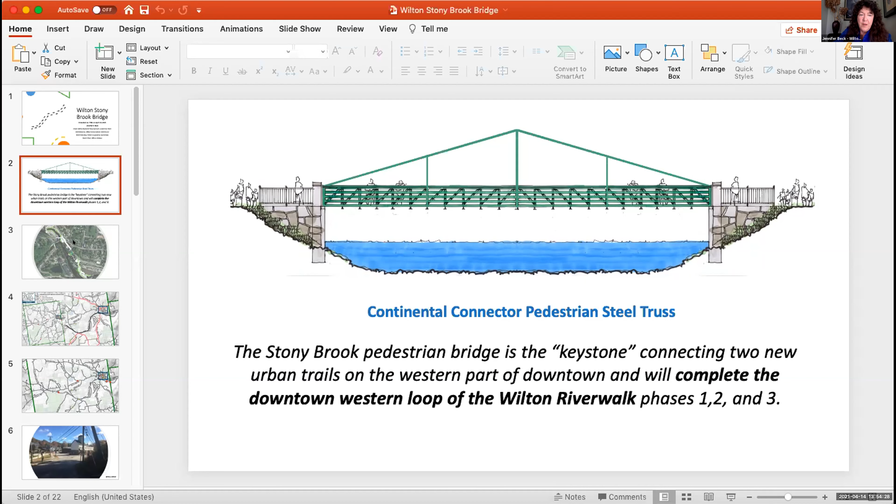We have a master plan that's been in place from GPI architectural firm, funded by a warrant article previously. The particular area we're looking at right now for the bridge is right here, connecting the two trails on either side of Stony Brook. This is the Souhegan that comes in, Stony Brook runs into it, and then it flows through town.

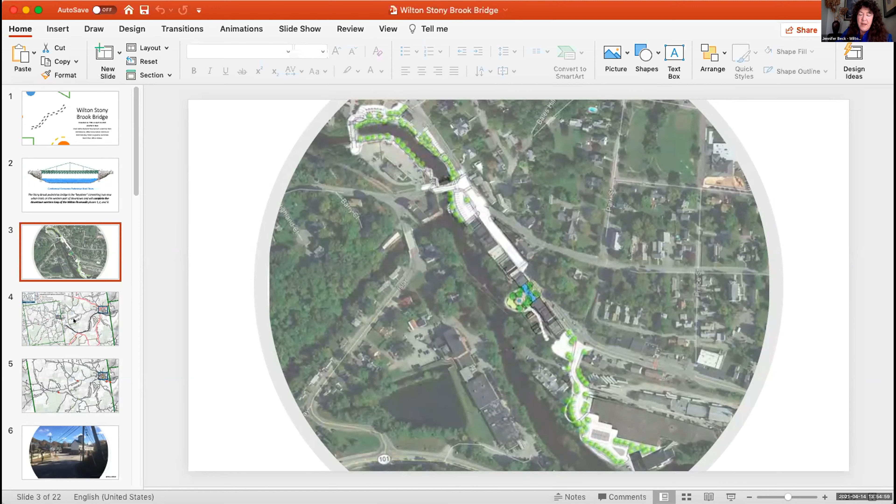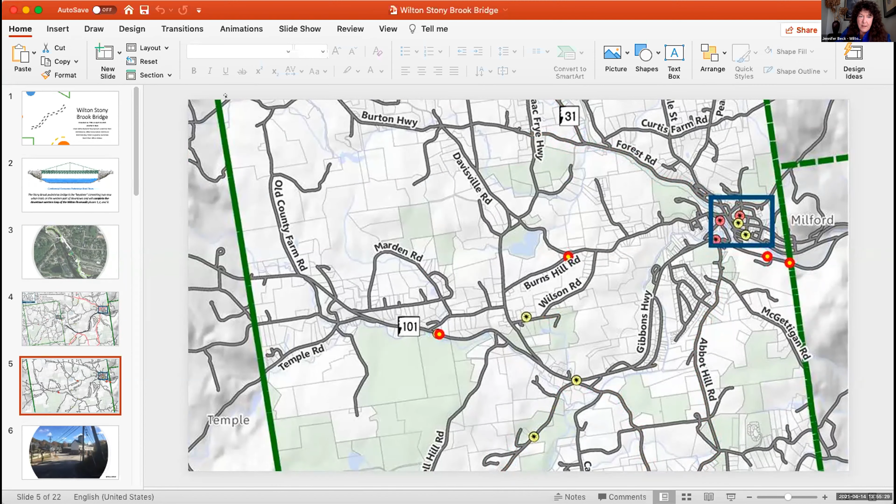We're blessed to have two protected rivers in our town, but also a couple of highways. To give you orientation, Route 31, a state highway, comes in from the west. Route 101 comes in and bypasses our little downtown area, which has been the focus of a number of pedestrian and bicycle accidents. This is the area we're looking at for the entire Riverwalk plan, with the bridge being the key node in that.

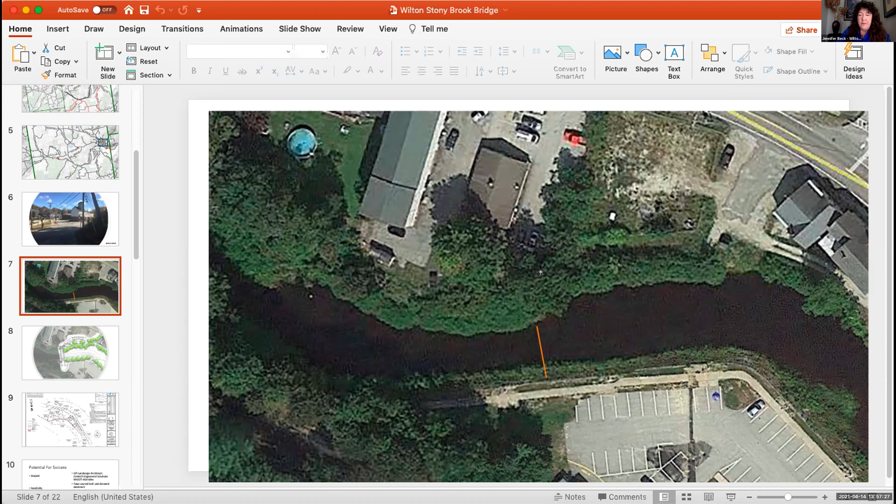What we want is for kids and everyone to be able to walk down this sidewalk, stay on it past our police station, take a left into what is now the new Riverwalk Phase 1, get down this sidewalk, and then be able to cross the bridge. This side of the river is currently under construction and will be done May 1st.

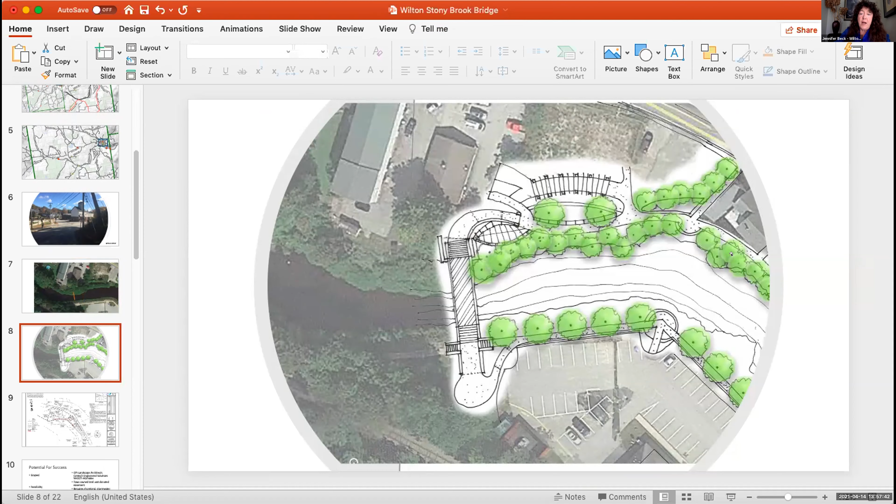Here's a conceptual of the bridge that goes across. This was granted as an easement by TDS, and it was funded by the AARP Community Challenge grant we got last year. Our easement area for that trail is right here, and the bridge would come across from the parking lot to here, then follow down, which activates parking on the other side at our municipal parking area, bringing people onto the other side of town while completely avoiding that intersection.

The intersection is on the 10-year plan for DOT. It's looking now at some stop signs, but it's not accommodating pedestrians in that plan—it's just making it safer for cars and slowing down traffic.

So looking at what you're considering right now in terms of scoping this project, we've triangulated a number of estimates on what the bridge will cost. We've taken cost estimates from GPI Landscape Architects, and from Contech Engineered Solutions, which is specifically the bridge itself. New Hampshire DOT also has this project rated 4th on the 10-year plan, but we were absolutely encouraged to apply for TAP.

We've taken those estimates and come up with the $750,000 that we believe it will cost. The bridge itself is not that expensive. We have in this presentation, in the appendix, the specs on the bridge. We're talking about a steel bridge with a wooden flooring.

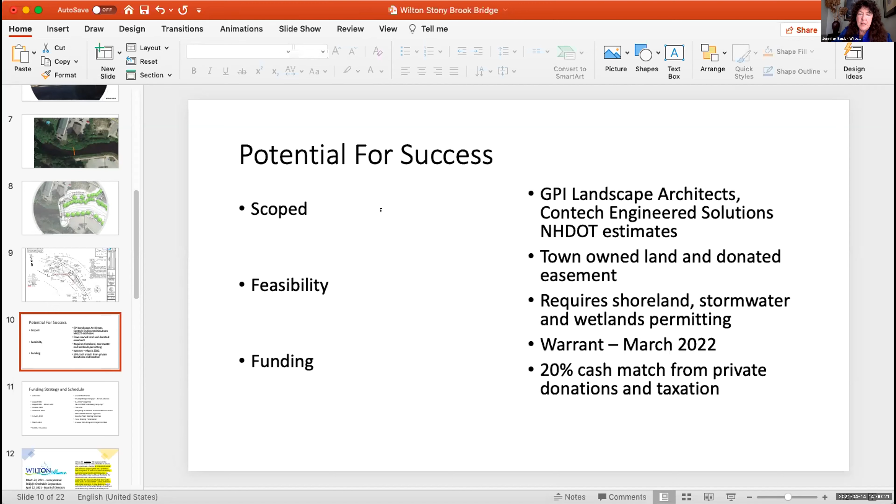Our funding schedule right now and strategy for this is assuming award notification in June, we hope. And then we would start looking at building a bridge campaign.

Now, Wilton likes to do things a little differently. We only have 3,800 people, about 1,000 of them live downtown. This project has already been through a number of warrant article awards, so people are very aware of it. The bridge itself is something we really want to use as almost an icon of hope for the future revitalization of this town, and what we can actually do with that entire walkable downtown, which today has lots of fragmented parking lots and sidewalks that end arbitrarily.

What we're trying to do is create that walkable connection all through town, which also starts to feed a lot of the economic viability, the theater, and a lot of the anchor attractions in town. What we really want to do is socialize the whole notion of the bridge.

We've got a new nonprofit, entirely dedicated to investing in the town. It's the Wilton Alliance. I am chairing that particular nonprofit. It's a 501(c)(3), and we have just tasked that organization with raising about 100,000, more if possible, so we don't necessarily have to go full taxation on a warrant article.

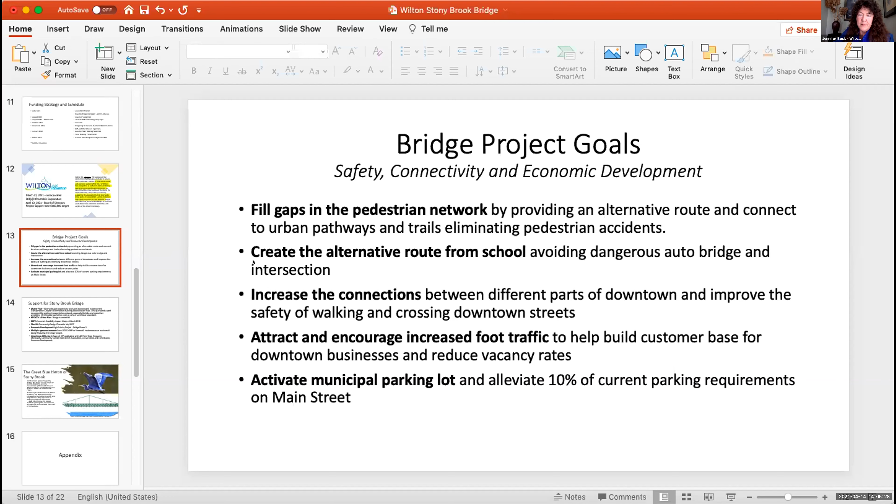Massive support for this project. A small town can really coalesce around an idea or a vision, and that has been the case for this particular project. It is in our master plan. The whole Riverwalk and connectivity goals are incorporated in the current transportation chapter.

And then a couple of interesting stats. When we did workshops, which we do constantly with our residents on the economic development side of things, about three-quarters of the residents want to expand what is now an existing transportation network, if you will. We don't have buses and Uber and Lyft coming to Wilton, but they especially want bike and pedestrian amenities. Another 78% rated pedestrian trails as very or somewhat important in the survey work that we did.

As I mentioned, the bridge is ranked number 4 in DOT's 10-year plan. NRPC has actually done a number of studies for us, one of which was an economic feasibility impact study about the Riverwalk itself, back in March of 2018.

We did a Plan New Hampshire community design charrette, which had about 250 residents out of 3,800. That's pretty good, that's more than town meeting. That came in July, and that's what actually started to tip us into the whole notion of the Riverwalk.

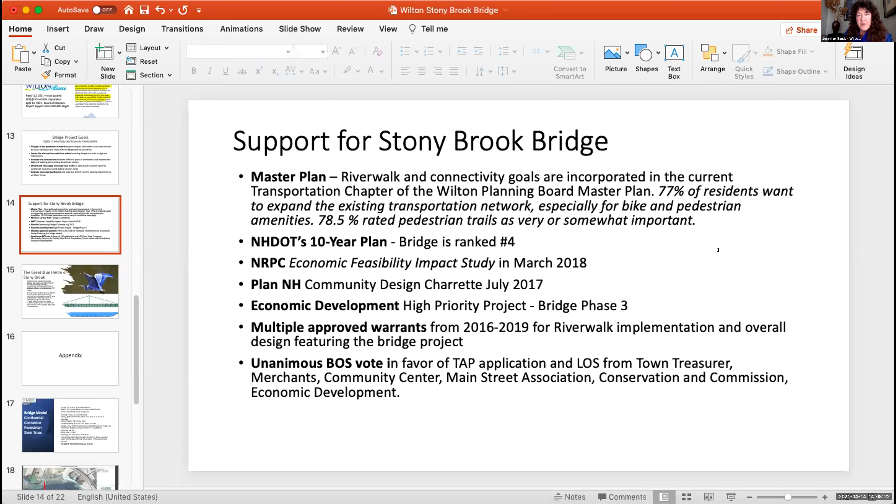We have unanimous Board of Selectmen votes in favor of supporting this application. We also have letters of support from our town treasurer, a number of merchants downtown that are waiting for this to happen, the community center, our Main Street Association, the Conservation Commission, and the Economic Development team. Actually, this entire project is a joint venture from its very inception between the Conservation Commission and Economic Development, which makes it kind of interesting.

And finally, I need to tell you that we have a bit of a mascot associated with this entire downtown plan. The great blue heron of Stony Brook can be spotted regularly fishing in that particular part of the river right underneath the dam. She actually did a flyby very, very low over a crowd of about 250 people when we opened phase 1 of the implementation. We take that as a very good sign.

And you might be interested to know, and this is really a lot of the personality of Wilton and what we're all about as a town.

According to North American Native tradition, the blue heron brings messages of self-determination and self-reliance. Maybe that's why we've never applied for TAP. They represent an ability to progress and evolve. We're certainly doing that, and they have the innate wisdom of being able to maneuver through life and co-create their own circumstances. So call it Yankee ingenuity, call it a small town that doesn't have a tagline because there are no words to describe people in Wilton, a very eclectic town with private schools, public schools, and homeschooled kids, and a really interesting intellectual community of a bunch of characters. So I know this looks like another infrastructure project to all of you, but for us, it's a symbol of hope. Thank you.

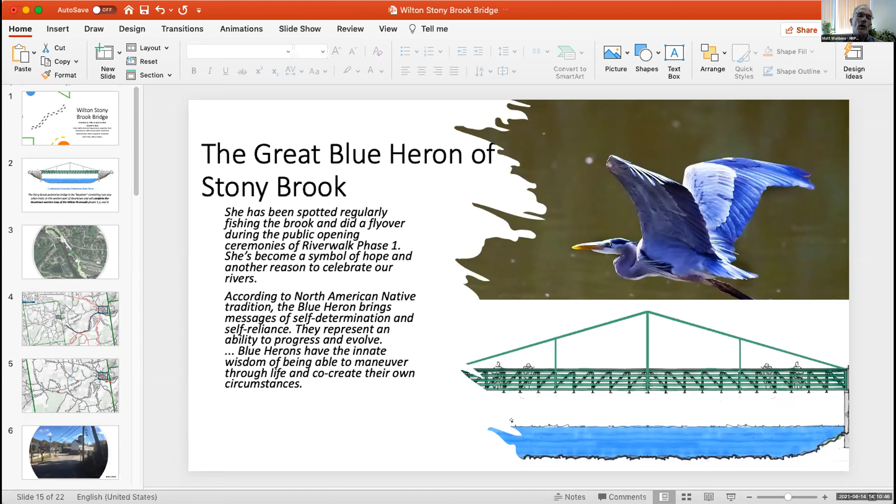Any other questions for Jennifer or any of the presentations? So I know we went over. Sometimes that happens, my apologies. But thank you for hanging in there. And Greg, I guess I'd hand it back to you for adjournment. Can I ask Tad, Mark, and Lincoln just to hang in for a minute afterwards, if you have time? 10-4. Okay, sounds good.

Okay, what about the scoring? Right, so there's a link to the scoring, and it's in the chat box. I originally had said to do that scoring by the end of business today, but I thought I'd extend that till tomorrow morning, say by noon tomorrow, if anybody is out of time and has to move to another meeting or some such thing. All right, does that make sense? And if there are any issues with that link, I do have a backup plan.

So if any of you that are voting just give me a jingle or email me, and we'll fix that. All right, and the other thing, Greg, was that the TTAC rankings were not going to be announced today. They're anonymous. Right. Okay, just want to make sure that everybody understood the voting procedure.